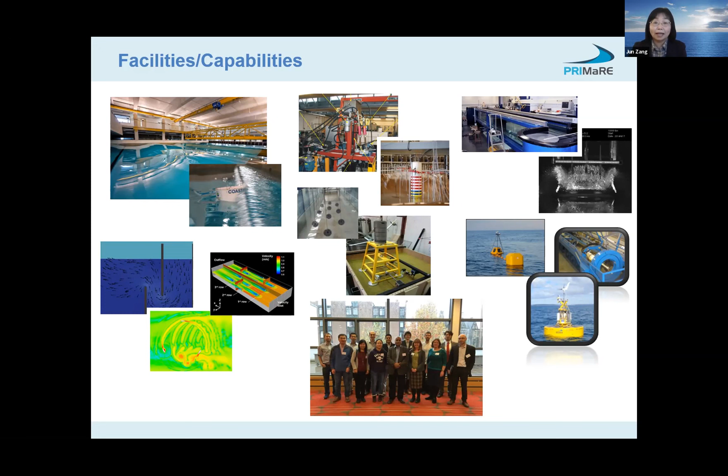So probably this will be my last slide. Apart from this new PRIMaRE seminar series, we are going to have our 10th PRIMaRE conference, which will be held in Bath in June, on the 27th to 28th - two days of a free conference. The call for abstracts is now open, closing on the 10th of March. You can go to the PRIMaRE page to submit your abstract if you are interested in joining the conference. That will be an in-person conference, whereas this is an online meeting.

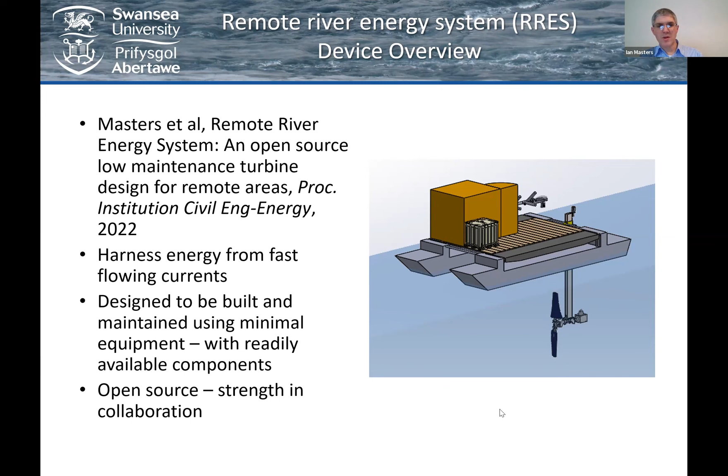So the device we're building is not quite the one we published in the paper - this is using some locally available barge technology. The barge exists and we're just borrowing it from one of our partners. It's a 10-metre long floating platform with a 2-blade turbine underneath. I'll come back to why it's 2 blades in a little bit later.

A water pump power takeoff, on a simple catenary mooring. The mooring spreads about 60 metres in 20 metres of water depth. We fitted it with lots of sensors, as many as we think is useful. And to keep us all going, there's a control cabin where we can run a laptop and other things on top of the barge. So that's the device.

We're trying to follow best practice, and there's a technical standard about early stage development, TS 62600-202, which outlines 4 stages of development for a small scale test. You evaluate your design and technology readiness level, or TRL, as you go through the stages. As you iterate around each stage and go on, in theory you make sure you don't move on from one stage to the next until you've got all the problems sorted out.

We're working against a deadline, so we're having to compress our stages 3 and 4 a little bit, but the first couple of stages have followed that. So the paper I've mentioned is our stage 1, our sort of concept design, and we've just completed stage 2.

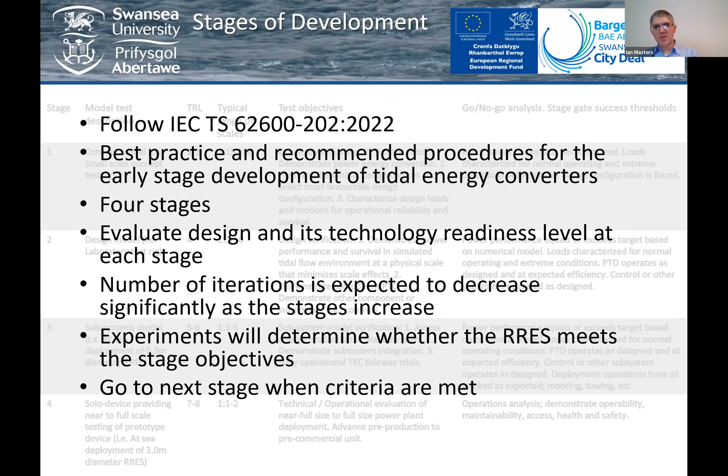We've also completed all of our licensing, consents, risk assessment, method statements for going into sea, and we've completed our design for manufacture stage. So we're currently outsourcing components to be manufactured, and during February we will be assembling this system and putting it in the water.

We're starting with an at-sea test of a platform with a small rotor, just to bottom out some of the problems. Then we're going to take the full-scale power takeoff unit on a bench. After that, we're going to deploy some sensors, and then deploy the barge again with the full-size turbine. We have a license deadline of 31st of March, so pretty quick timescales at the moment. And I'm hoping to share with the wider world how we get on with this system.

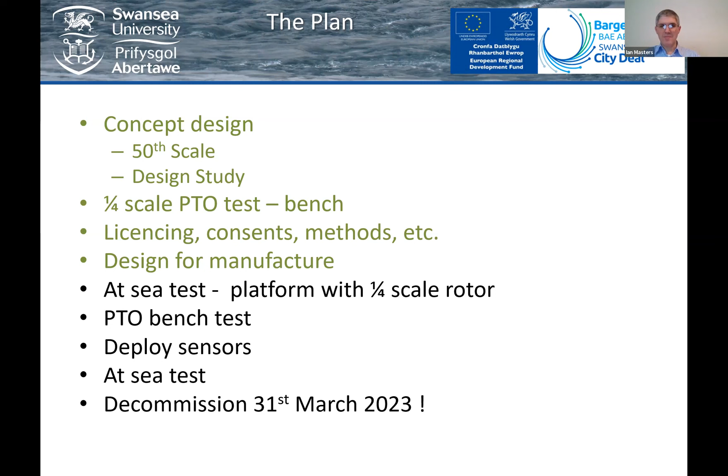So the test site is part of META, the Marine Energy Test Area. META have, I think, 8 or 9 sites in and around the Milford Haven estuary in the west of Wales. We're using the Warrior Way site, which has fast flowing water.

For those of you outside of the UK, if you drive west from London for about 4 hours, you get to the other end of the M4, and then a bit further you get to Pembrokeshire. It's about an hour and a half from Swansea, where I am at the moment.

The site is a tidal estuary. It's about 20 metres at high water in the location we've chosen, with a tidal range of typically 4 or 5 metres, sometimes up to 10. It's mostly tidal, though there are some river inputs to that location.

The META team have been great in helping us with our risk assessments, with our marine planning, and all the licensing we've had to do with the Port Authority and Natural Resources Wales, who operate the environmental licenses for the area.

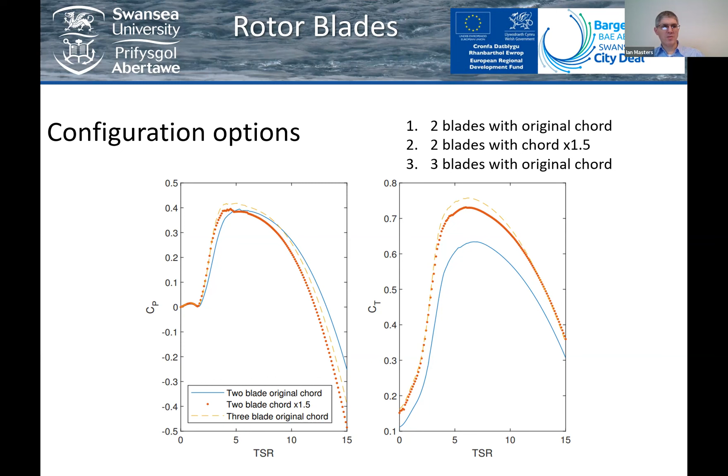And we have a peak mechanical power at the rotor of about 7 kilowatts. We're expecting slightly less than that at the pump. Because this is a remote location system, we're not too worried about the efficiency of the power takeoff, so you simply just oversize your rotor slightly for a particular power output. We're looking at robustness rather than efficiency.

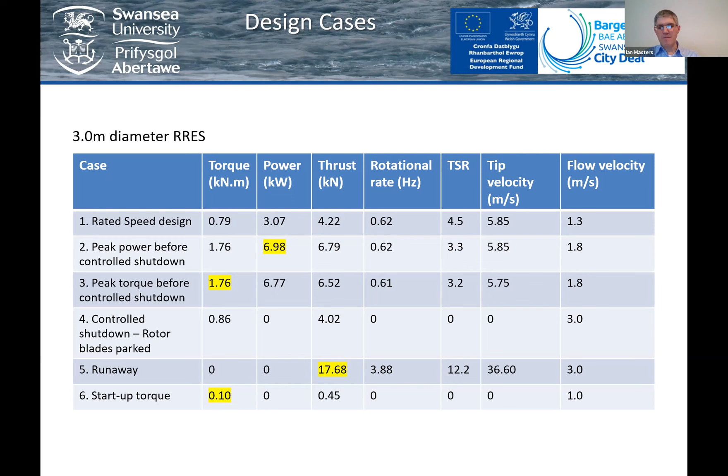Okay, this is our first real test, was to build the power takeoff at a small scale in the lab. We've learned a lot from doing this. It's a simple crank arm with a pump.

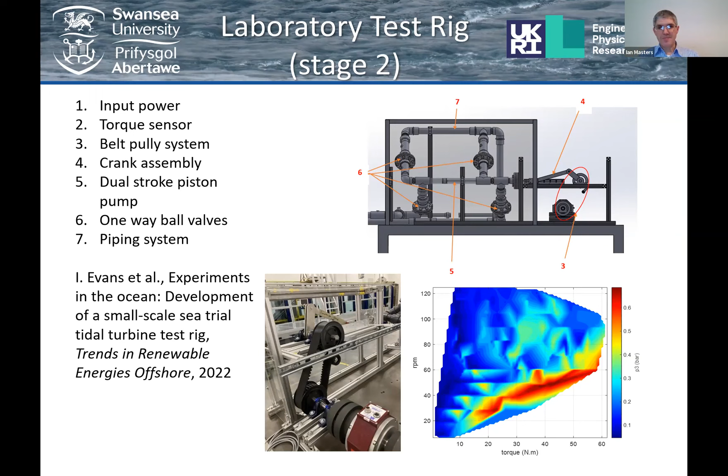The thing we're going to do next, once we've built the system, is deploy it in the river with a small turbine. We've 3D printed some small turbine blades, less than 1 meter in diameter. That's going to allow us to prove our deployment process. We're going to check our mooring load sensors, check our data logging system is working, and practice doing experiments with the small power takeoff we just showed you on the bench. That really is a risk reduction stage, both technical and operational risk reduction. That's only going to be a few days in the water probably, and then we'll decommission briefly, go back to the lab and do the next bit.

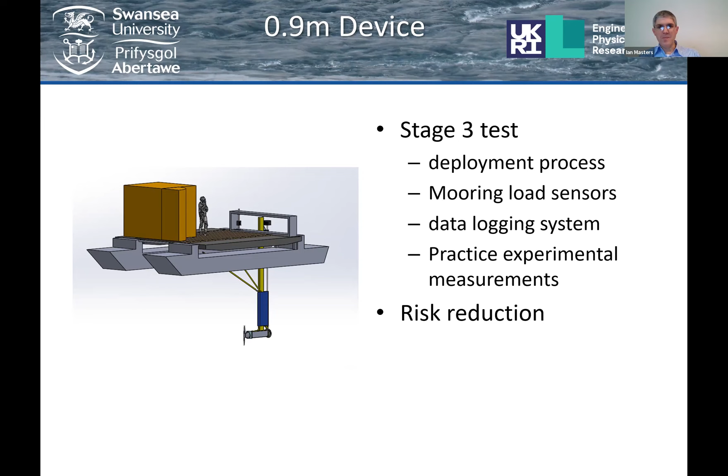When we're ready to redeploy a full-scale system, the first thing we're going to do is put some sensors down. We're using a Raspberry Pi based low-cost data logger, which some of you will have heard Tom talk about in the past. We're taking lots of measurements around the platform to try and maximize the value of this experiment. We have at least one ADV on the platform, probably two, for taking high quality point measurements. We're going to put down three ADCPs, some of those in the right place to use the IEC standard for performance, and hopefully one of them will pick up some wake effects. On the other side, as you can see in yellow, is our converging beam ADCP system on the SUSRIF platform, which I talked about at last year's PRIMaRE conference. We're going to put that unit back in the water and use it to take large scale ADV measurements at rotor hub height.

We've instrumented the turbine using blade root strain sensors for torque and thrust. We're also measuring RPM, and measuring mooring loads from the mooring lines. On the power takeoff pump, we're measuring flow rate and pump pressure to give us power output from the pump. Hopefully we'll be able to do some wake measurements using a drone for video measurement and also transects from some sort of vessel, though we haven't quite worked that bit out yet. We're going to try and do all of that.

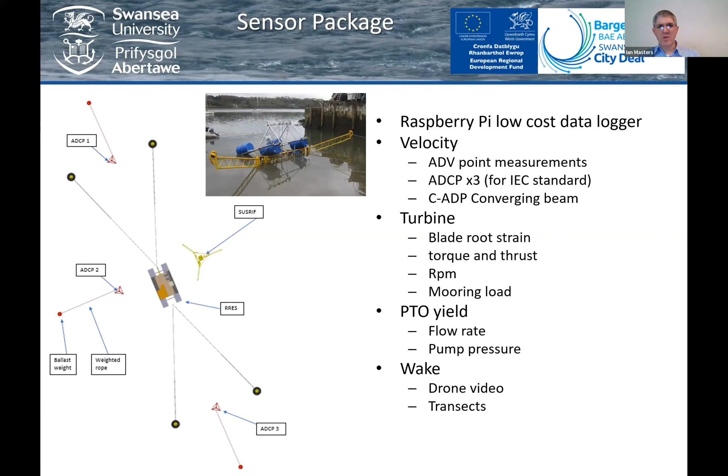Okay, this is the full-scale system design. As I've mentioned before, it's a robust design, so we've gone with a fixed pitch, variable speed rotor. We have wet running bearings, which sit inside the yellow housings at either end of the main drive shaft. The crank mechanism on the left of the slide is a wet running crank mechanism, driving this pump arrangement, and we have closed loop fresh water inside the pump. If we get some leakage from fresh water to salt water, we're not too worried, and we should be able to pick that up by monitoring water levels.

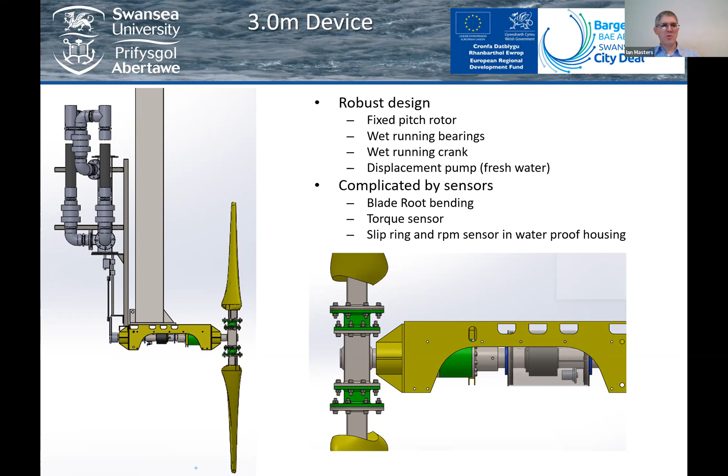That robust design gets completely complicated because we want to put some sensors in. The green bits on the image are the blade root bending sensors and torque sensors, which take a fairly clean, robust system and add loads of complication. We also need a slip ring to take data signals out, and we've got an RPM sensor. Those both sit inside a waterproof housing in the center of the shaft, which you can see there as well. You quickly realize that you try to do something simple, and then when you actually want to turn it into an experiment, you have to make it complicated. So that's the system.

I really wanted today to talk about collaboration, and perhaps in the questions and discussion in a moment we can do that. In March, there's potential for other things to be deployed on the platform while we're in the water. So if that's you, and you want an opportunity to put a piece of kit on the platform for a couple of weeks, come and talk to us. We have a platform available. We're also very open to visitors. Obviously we're going to work out our operational schedules, but if you would like to visit, you're welcome. We are going to publish the data we're collecting, and we're going to publish the turbine design and the SolidWorks files. We want to open source this and collaborate.

That might take us a little while to happen, so if you want that sooner, please ask us for early access to that data and turbine design. When we've completed this set of trials in March, the platform will be available for other tests. So if you have a different turbine you'd like to test, or another type of technology, talk to us and we can make the platform available.

The turbine itself, perhaps in the longer term, we can use it to test other components. It's not that difficult and expensive to change the blades for a different design. We could look at tip features or trailing edge features on a blade design. And of course, the power takeoff can be swapped out for other types of power takeoff as well. So all of that opportunity is there, and we're happy to talk to people about some of those opportunities and what's possible after we've finished our testing. That's the collaboration we're hoping to have with people. I'm very open for conversations about those things.

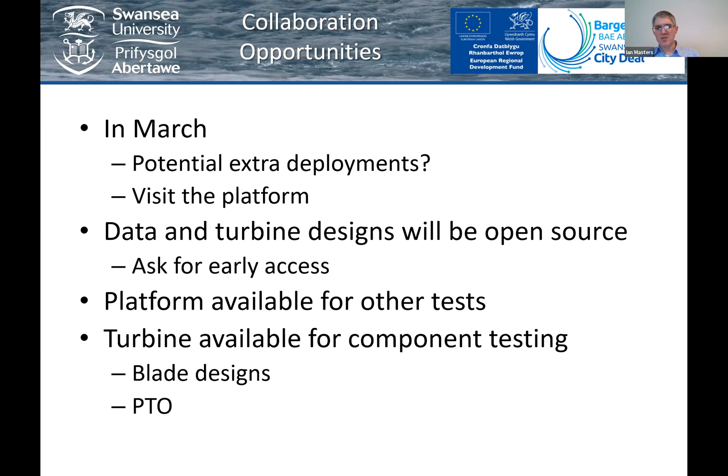So what have I learned so far? And we haven't even got this in the water yet. The first thing I've learned is field testing is complex and complicated and requires lots of different layers of information. We've been working through those now for the last 6 months, and we're almost there. And of course, once we get to the water, everything will change again.

We learned quite early on that putting a turbine in the water is the easy bit. It's only of value when you've got lots of data, and the sensors are not cheap and they're not easy to configure. So we really are trying our best to get some good quality data from this platform design.

I'd like to thank our team at Pembroke Dock Marine, Meta, Catapult, and Rudders Boatyard, and our other local suppliers that are helping us with this development. Like I said, we're aiming to collaborate and open source. Over the next couple of months, my plan is to put updates to this technology on Twitter, and there's my Twitter handle. Thank you very much.

Thank you, Ian. Have you finished your presentation? I have, I thought I wanted to leave plenty of time for some questions and discussion. Okay, that's great. Yeah, excellent. Congratulations on this great project, and thank you for sharing that with us.

Before I open the floor to questions, can I ask one question about the flow conditions, the local water depths, and the wave conditions? I'm just wondering whether some other project may like to collaborate as well.

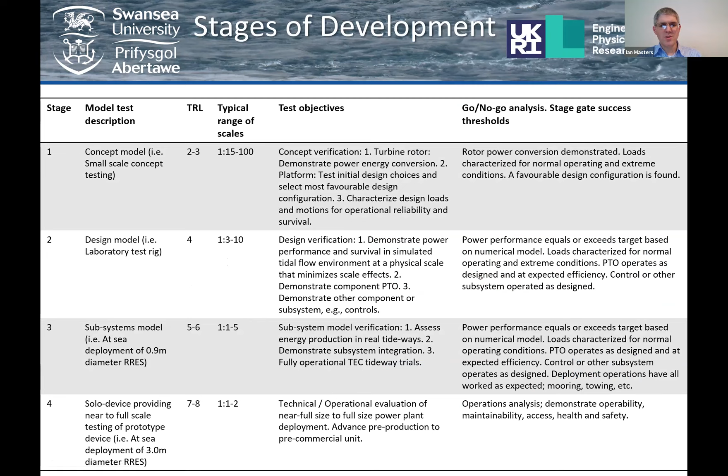Yes, let me come back to the site diagram. So we're at the top end of the Milford Haven estuary, in Milford Haven, and it's quite a large test area, about 1 kilometre in length. We're using the far western end of the site because it's the deepest water. We think it's about 20 metres at high water, maybe 15 to 16 at low water, above a sort of sandy, gravelly seabed. It tails off quite shallow underneath the cliff on the south side of the platform.

There are other sites within the Meta family which have larger wave climates, for example, so if you're looking for wave climate, go somewhere else. It's pretty sheltered, there's a little bit of fetch on it, but not much. But yes, very much available. Flow rate is about 1 to 1.5 metres per second, typically 1.8 on a spring, particularly when there's rainwater flowing downstream as well. Slightly faster on the ebb than the flood.

Okay, thank you. Any questions from the audience? Please feel free. I'm just wondering how can you unmute people on this Zoom platform? Also, you can type your question in the chat box, or you can just speak up to ask any questions to Ian. We can have a couple of minutes before we invite Stuart to present his research. I think people can unmute themselves now, so if you have any questions, just unmute yourself.

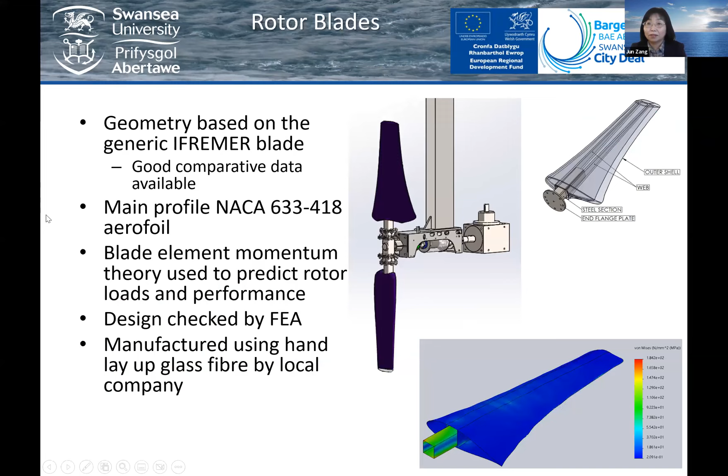Okay, mooring lines all the way. Moorings are on this one. It's a gravity anchor with some chain on the seabed and a catenary layout. We have a pair of moorings each side, and those come to a single line onto the platform. So it's a Y mooring arrangement.

We did some design work, and then after discussion with Meta, we contracted a consultant company to check our calculations. So Iestyn in my team designed those moorings, and they went and checked his numbers and basically upgraded it. We used some fairly simple design calculations, using friction, weight, and thrust. It's not a big turbine, so it doesn't need massive moorings, but they're fairly substantial.

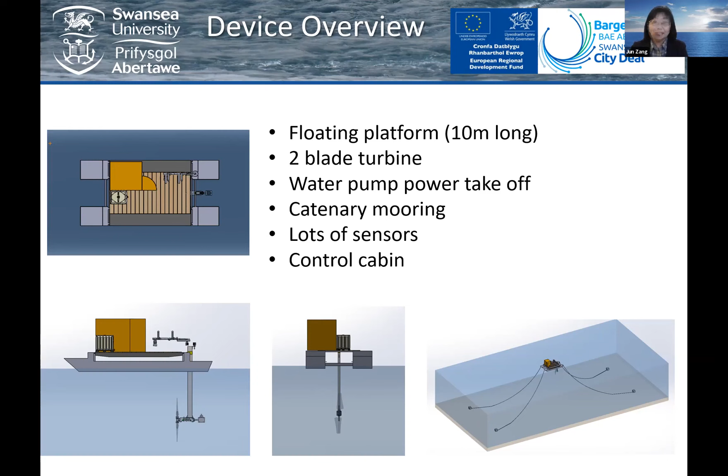Thank you, Ian, I guess Ali is happy with your answer. Thank you very much for your contribution, it's a very interesting project. Everything goes well with your sea trial, and we'd love to hear what's going on afterwards. Yeah, I'll come back in June and tell you all about it. Okay, that'd be great, I hope we can see you in Bath in June. Thank you.

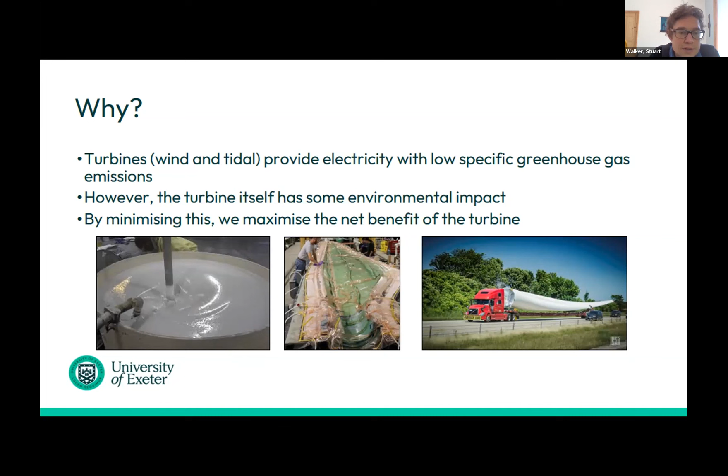But when we look in future, if you're replacing the electricity in a country that has a very low emission electricity grid, you need to think about the embodied energy and the embodied impact of making a turbine, in order to make sure that you actually have a net benefit - that you're replacing higher impact electricity with lower impact. So materials are one way that we can keep progressing and look to reduce the impact further. So that's the reason for doing the work.

So if we look at turbine blades, we've got some wind and some tidal. Just to give you a rough idea, the blades on a tidal turbine, something like a 9-meter blade - this is looking at a single blade of the type in the lower right, the Atlantis type there, rather than the old Sabella design. The kind of wind turbine looking style tidal blade, that's probably about 3 tons worth of blade. So obviously 3 of them adding up to 9 tons in total.

All the problems and opportunities I'm going to talk about today are shared with wind, so I'll keep referring to wind a little bit as well. Obviously in a wind turbine you've got a much bigger blade, a more slender design, and less mass per unit length. But those blades, when you get up to the big 100-meter plus blades, you're starting to look at over 50 tons. So there's huge amounts of mass of this material up there and down there, as it were.

Working out from broad projections of the installed capacities that we're going to be looking at by 2050, you can see that we're looking at the order of megatons of blade mass only going into operation. So it's a big potential opportunity to do something with.

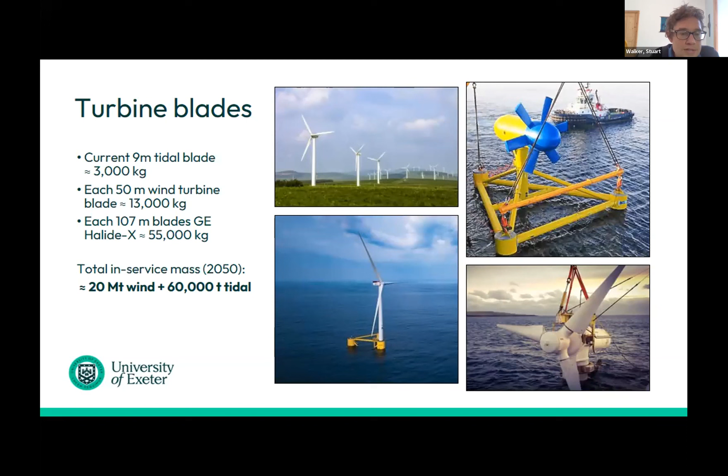So blades - the reason for focusing on blades in some senses is because a lot of materials in a tidal turbine are quite recyclable. A lot of ferrous metals, a lot of steel and such like can be recycled relatively simply, and we know how to do that very well. Blades are one example of where composite materials are used - carbon fiber and glass fiber reinforced polymers tend to be the most commonly seen ones.

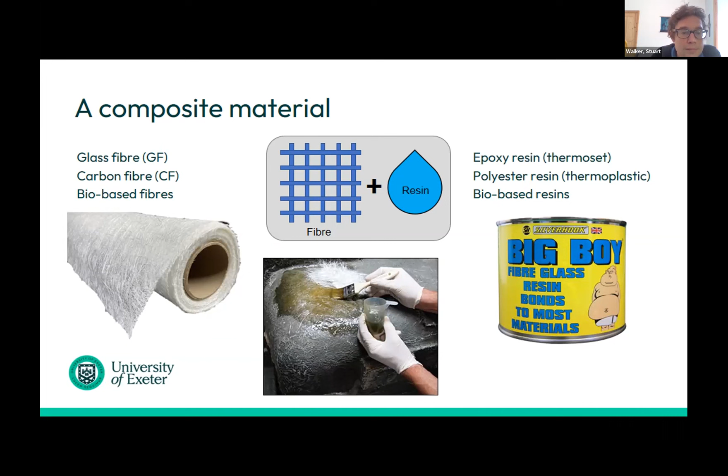I'm just going to go over quickly a composite material and the fundamentals of what that is. In very simple terms, you have a fiber element, as you can see there on the left - that's a roll of glass fiber - and you have a resin element, as you can see on the right, an example of an epoxy resin. This image shows a very small scale, a DIY scale if you like. Mixing those two components together is how we get a composite material - a glass fiber reinforced polymer or a carbon fiber reinforced polymer - by mixing those two together and a curing process. So that's at that scale.

It's actually exactly the same at a big scale, a turbine blade scale. You can see on the right there, that's a huge - I think that's the Siemens factory for a wind turbine blade. You can see the rolls of fiber there on the inside of the turbine, being laid up with the resin to make the composite material. Similarly in the image on the left, that's a tidal blade, after that process has been undertaken and coatings and things have been put on. But you can see it's fundamentally the same material, the mixture of those two parts.

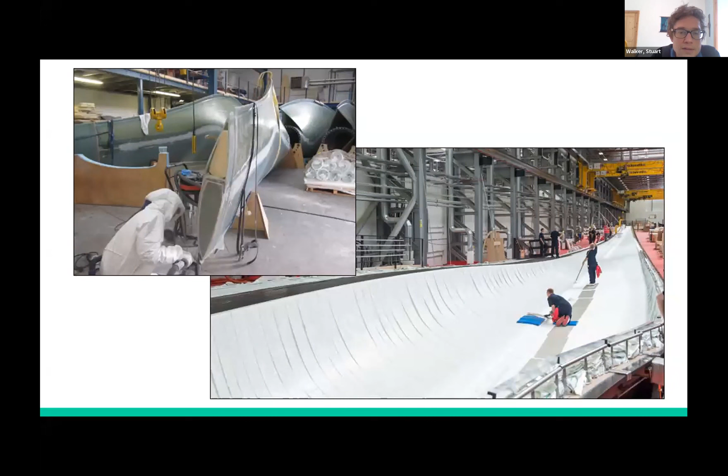One of the problems with these kind of materials is that they're very difficult to dispose of. They're not recyclable like steel or another metal type product. They're quite hard to get rid of, so at the moment they are effectively a single-use material.

So there are, in theory, three disposal options. I'll come back to the first two, landfill and incineration, just to cover repurposing at the end. There are some nice ways of reusing leftover blades, but those are vanishingly small, particularly when we talk about the megatons of mass going into the system in coming years. It's a nice thing to do for a few blades, but not really a major part of the disposal route, which leaves us with landfill and incineration.

So landfill: a composite material is relatively inert. It can be buried in the ground and probably won't cause too many problems, but then it becomes a problem of land use and the resources used to put those things in there, and the land occupied by those huge amounts of mass we're going to be talking about.

Incineration: the materials can be burnt, and we can probably extract a little bit of energy back from the heat generated during that process. But it's a very energy intensive process to incinerate a reinforced polymer, and we don't get anything material wise back at the end. It can also cause problems with air quality and toxicity issues from what's released during incineration, so that's not an ideal option really.

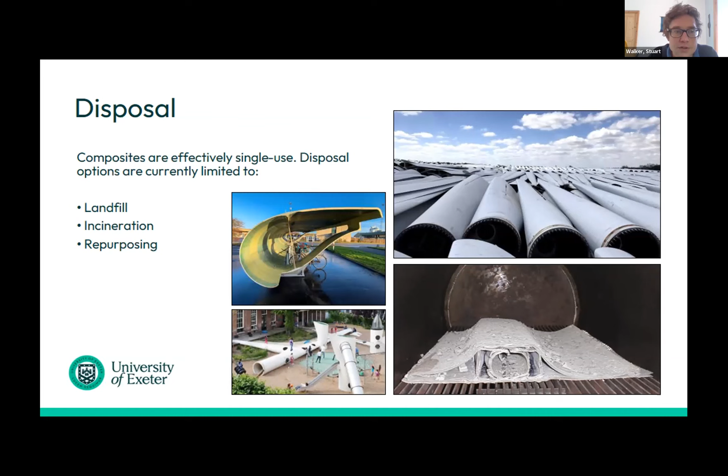So in a minute we'll look at some possible other routes. First, a bit more simplistic look at composites. An ideal composite material that would allow us to dispose of it sensibly would be if we could have the fiber and the resin, mix them together, and get our composite material.

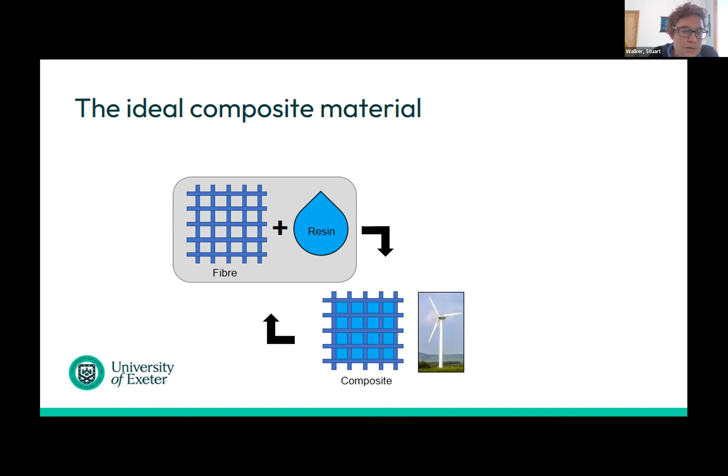We could then use our composite material, and if at end of life we could separate it back into the fiber and the resin, we could rebake that or treat those with individual methods allowing us to recycle or reuse them. The problem is that at the moment, when we mix the resin and fiber together with an epoxy resin, which is used most of the time, that's a thermoset resin, we get our composite, those two parts together, but we're not able to then separate that back.

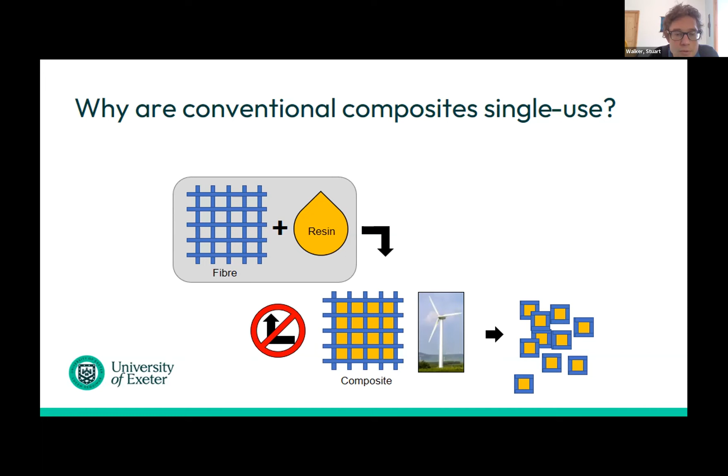So what we end up with is we can break it down into smaller parts, but they're still a mixture of those two elements, which limits the disposal options and sends us down the route of those two we talked about.

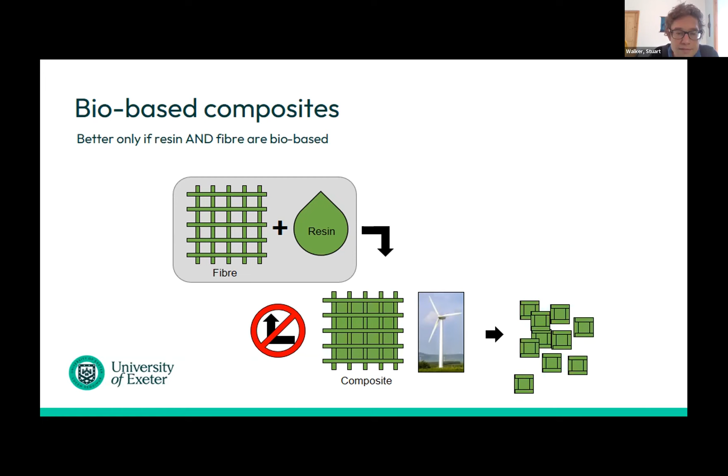So in theory, if you had a bio-based composite made of both a bio-based fiber and a bio-based resin, something natural in both, you could make that into a composite and use it in your product. We still wouldn't be able to separate the two back to the individual elements, but when we broke that down, we'd have a single material type. In theory we could then look to compost that or do some sort of biodegradation, which might give us a small benefit and allow us to regrow bio-based materials in future. So that might be a potential option.

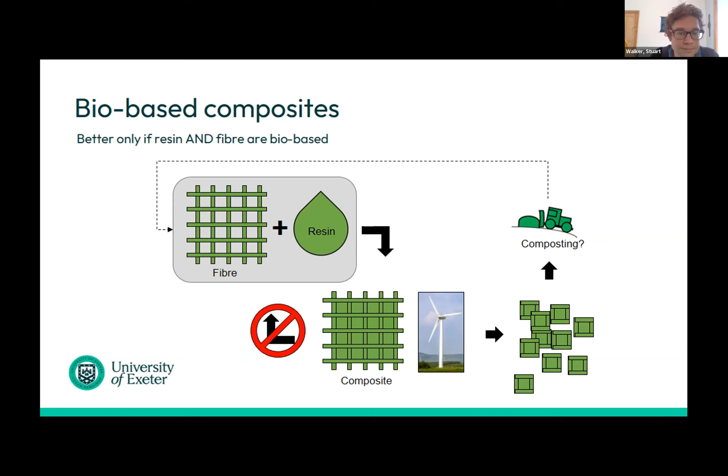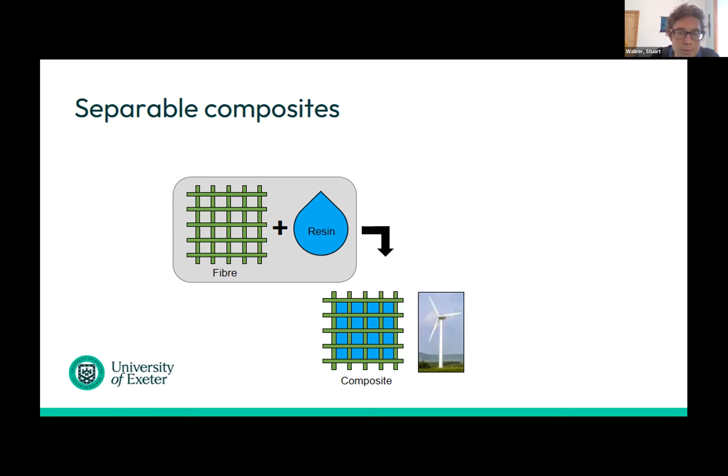There's also what I'm calling separable composites. If we use a thermoplastic resin rather than a thermoset resin, that's a resin that can be heated and separated. The reason this isn't widely adopted at the moment is the ultimate polymer tends to have lower mechanical properties when this type of resin is used. But it does have a major advantage: when we use it, probably with the help of some separation agent or process, we can actually split it back down into the two elements.

The problem we then have is that the two elements aren't as good mechanically as they were originally, so we can't actually reuse it at the same level. We might be able to downcycle it for a different material or a lower level use, or we might just separate the two elements and send them down individual recycling and composting routes, so if it was a bio-based material or some other kind of disposal route. So that's a route potentially to more efficient disposal.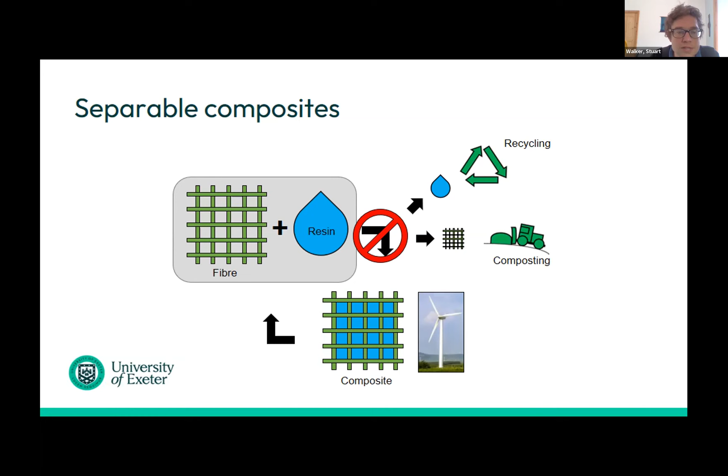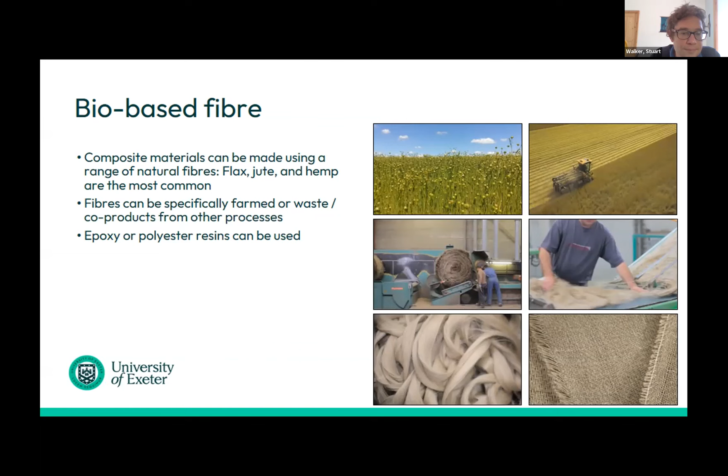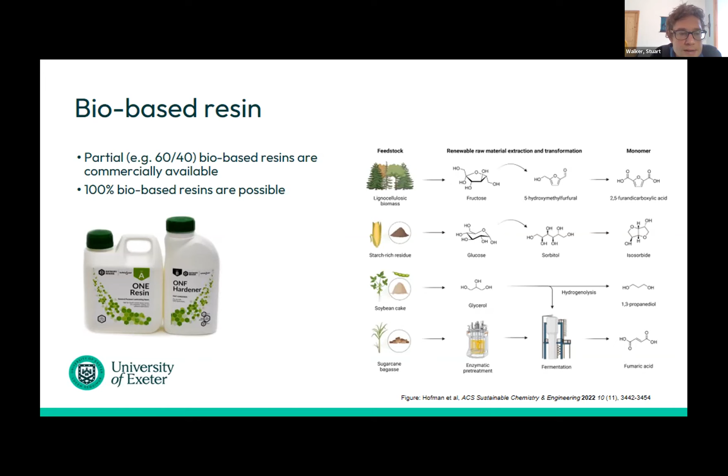We can also have a bio-based resin, either with the bio-based fiber or in a glass fiber usage. Similar to how we can make bio-based polymers, so plastics, we can make PET and HDPE, for example, from bio-based sources by breaking down things like sugarcane and forest residues. We can break them down into the chemical building blocks used to make these polymer products, and through that process we can get 100% bio-based resin. It's currently much more economically viable to have a mixed resin, partially bio-based and partially fossil-based, but the 100% bio-based resin is in theory possible.

So now I'm going to lead us towards a case study we've done comparing materials. But first, just to look at the life cycle of a fossil-based composite material versus a bio-based composite material. This would apply equally to a polymer or something similar.

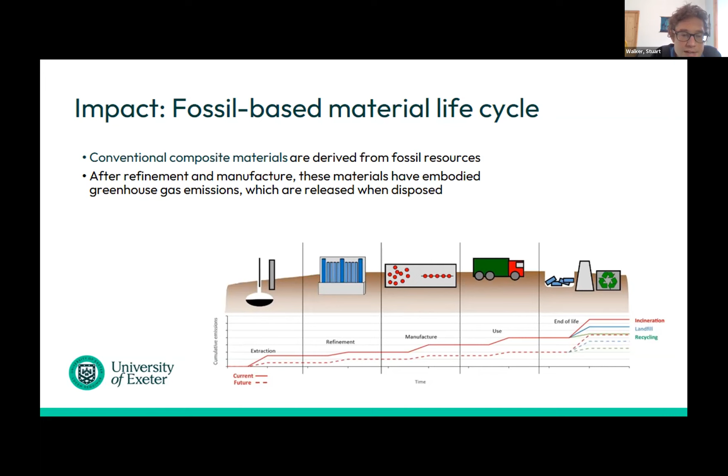If you look at this indicative graph, the red line shows the cumulative environmental impact over the lifetime of the product, essentially. Here we're talking about a fossil-based product - the top of my oil derrick image is missing, but you can see in the first step that's the extraction of oil from the ground. We then go through various processes - refinement, manufacture - all of which use energy and cause environmental impact, emissions and various other impacts. So that red line grows and grows over time as we get to use, and at the end of life, depending on how we treat it, we have various levels of emission. You can see in the fossil case that impact naturally builds up over time.

But if we can reduce those middle phases sufficiently, we can lower that line down, and you could in theory end up with a material that reaches the use phase and still has a net negative emission. So it can effectively be sequestered greenhouse gas at the point of use, in theory.

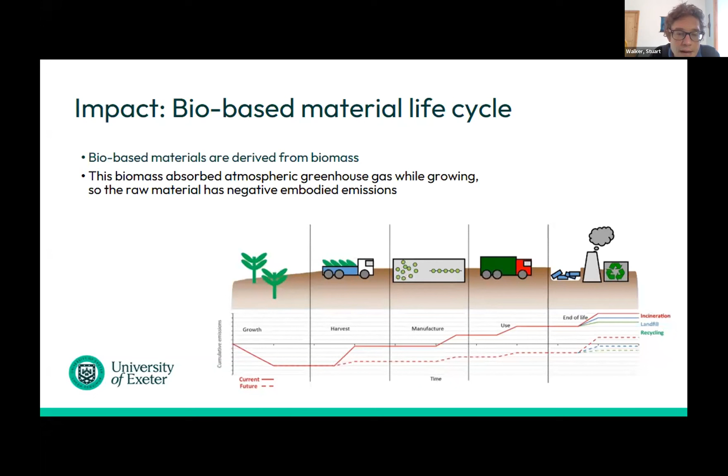So this sounds great for bio-based materials, and we're talking about challenges and opportunities. This sounds like a great opportunity. So to counter that, let's have some challenge.

So it's not a terrible performing material, the flax reinforced polymer, but it does mean we're likely to need quite a lot more mass in order to achieve the same level of performance as we would have in, say, a carbon fiber. So we can't have a lightweight carbon fiber blade - we're going to need more mass, and bringing more mass means it's going to have more impacts, because we're going to do more processing, more transport, etc.

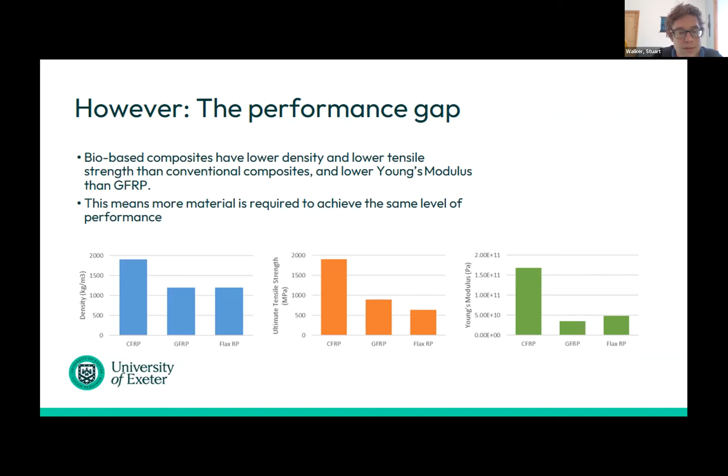So this brings us to a case study that we did as part of the Tiger project. Little bits of this I've presented before, so apologies if people have seen bits of this. We compared the environmental impact over the lifetime for a tidal stream turbine blade based on a few different materials, but here we're looking at glass fiber, carbon fiber, and flax, over a 20-year lifetime.

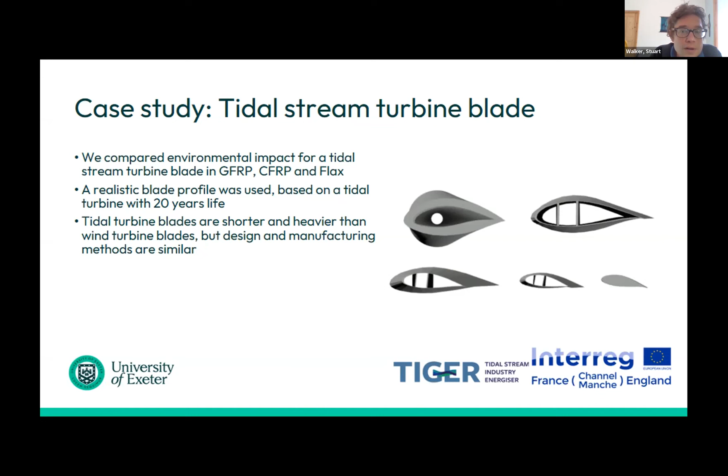The first step we did was to work out what mass of material you would need to have comparative performance to a glass fiber blade. So you can see there we end up with a glass fiber blade about 2.5 tons, a carbon fiber blade of about a ton, and a flax blade about 1.5 tons. So that looks quite good for the flax in theory - it's not as heavy as the glass fiber needs to be, so that's an advantage.

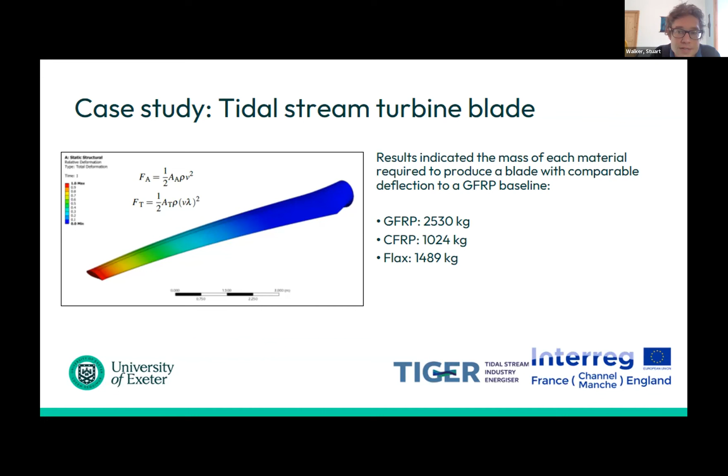In our model, we looked at a flax and polyester resin composite - a separable resin, as we talked about before, so a thermoplastic resin mixed with a flax fiber. In order to separate the two at the end of life, we need to use a recovery solution. The properties are down at the bottom, if anybody's interested - this is from information from Aditya Birla, who helped us with this study. The recovery solution allows you to separate the two and then treat them in different ways, as we showed earlier, but it does have its own environmental impact because we have to make that product. It has 25% acetic acid, so there's a reasonable environmental impact in making that separation product.

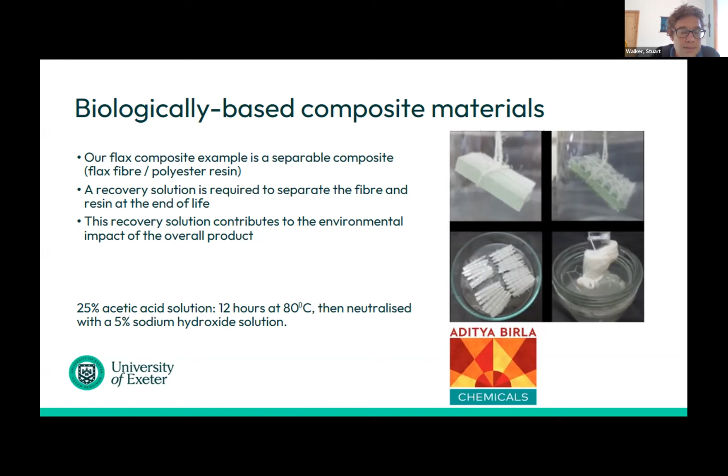Manufacturing process, we don't really need to worry about - this is just to show that we use the same manufacturing process. A common method, VARTM, was used in all the cases that we compared in our study.

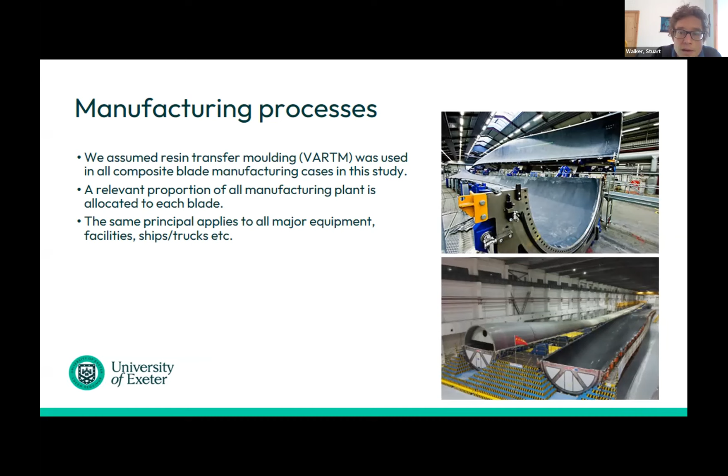So to move on to some results of the case study - first of all, I have results for glass fiber. This is a glass fiber blade made, used, transported, and then at the end of life treated by being sent to landfill. For the single blade, its total impact is around 15 tons of CO2. You can see the majority of that is from the materials, there's a small bit from manufacturing, transport is almost negligible, and then at the end of life we have a bit of an impact there.

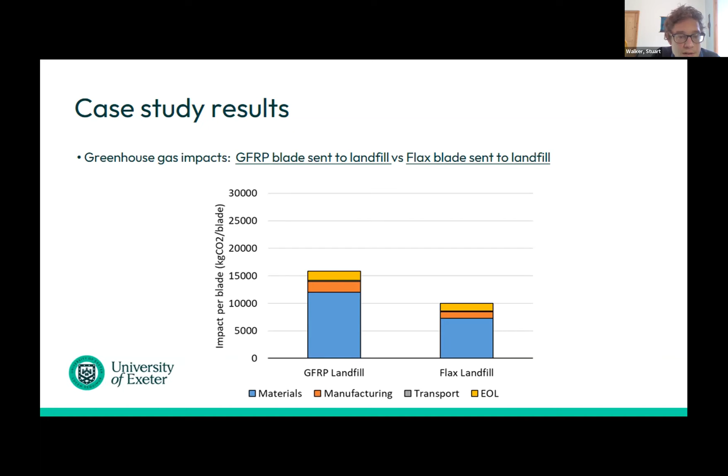If you then compare that to a flax blade, the flax polymer we talked about previously, treating the flax in exactly the same way - even saying that you send it to landfill at the end of life, which isn't necessarily what you would do, but as a comparison it shows us - the flax blade in that case has about a 10-ton impact. So that's a good advantage for the flax blade, it would seem.

If we consider the carbon fiber, it doesn't look good at all, really. That's because even though it's a lighter blade, the impact of the materials is very significant. As you can see, the manufacturing impact is low, and transport is very small because of the light weight. But then when you look at the end of life treatment through landfill, there's a lot of risk of carbon fiber in landfill, and a lot of embodied emissions required to process it and avoid risks of landfill leakage. So it doesn't look so good for the carbon fiber in this comparison.

As our final result, if we look at the furthest right, there is the flax treated through biodegradation. This is kind of what we imagine would be the ideal process: making the flax blade, manufacturing it, transporting it, using it, and then at end of life, separating those two elements. The flax fiber would be treated by biodegradation, so it would be composted essentially and go back into the soil, and the resin can be treated as a polymer. Unfortunately, that has a slightly higher impact than even the flax landfill treatment. So we should not consider these in isolation, but it shows us that the manufacture of that recovery solution needed to separate the two is actually quite a significant part of the overall impact, which is why the yellow bar there is a bit higher.

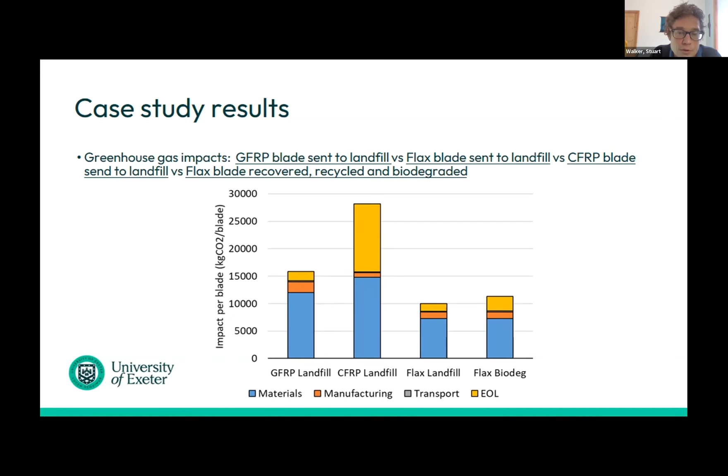As I said, we shouldn't just look at these kinds of results in isolation. They show us the greenhouse gas impact, but we should also consider a wide range of other impacts, such as land use, which is a key one, particularly when we're looking at products that we're growing and using land in order to produce.

So a comparison here just to show - apologies, this is from a different paper, so it has a slightly different comparison in it. But you can see, compared to a glass fiber blade treated by incineration or landfill, if we look at a bio-based blade, the land use in square meters per unit turbine blade is significantly higher for the bio-based blade. That's obviously because we're growing stuff in order to make that blade. So it shows us that although we might have a greenhouse gas emission saving, we have a land use penalty effectively. It's all part of the combined impact that we should take into account.

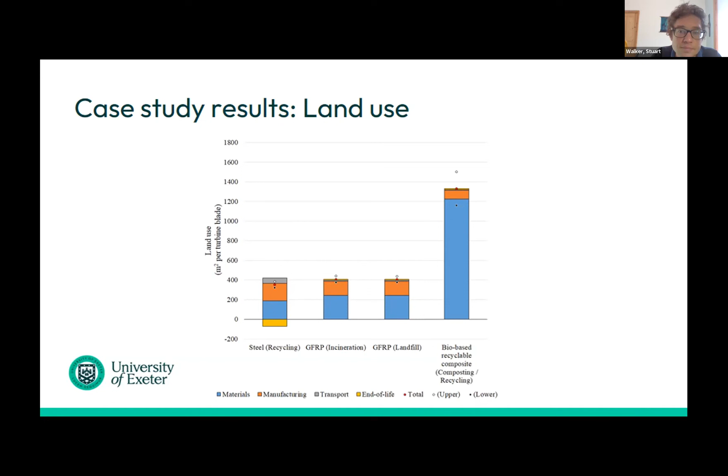So the results of the case study we talked about show that the source of the feedstock is important. That land use impact is high because we're growing that product specifically in order to make the flax for the blade. If it could be some sort of waste product from something we're growing anyway, then that land use would have no additional impact - it would be kind of double-using the land use that's already there. That would be a great way to go.

On the other hand, if we stop growing food crops and start growing flax instead, limiting food supply and perhaps even causing additional water use and other impacts, that would be a pretty significant negative impact. So growing the product doesn't have to just have a single impact - it can have a whole range of impacts depending on how we do it and how well we do it.

So, to work towards some conclusions: at present, bio-based blades do seem to offer a small improvement in impact versus current options, though not without their disadvantages. This needs to be looked into further, which is currently ongoing at PRIMaRE, as Ian mentioned, and various other places, looking at the impact on marine performance - for example, the impact of water uptake on the performance of a blade. If you have a blade that's in the water for 20 years, will it still be performing as well at the end of life? It appears that perhaps not, but that work is ongoing.

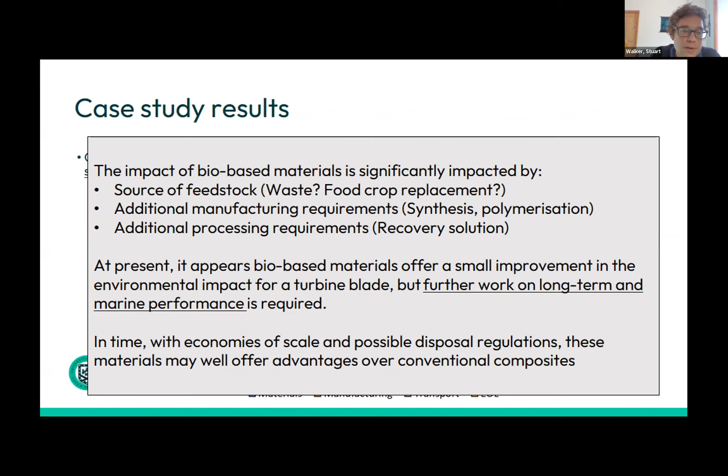Looking at those thermoplastic resins that allow us to separate the two does raise the possibility that if we're going to separate them anyway, we don't necessarily need to use bio-based materials. If we can separate the two, we can look to use other options, provided the materials can be separated, going along different end-of-life treatment routes. That seems to be where the wind industry is going at the moment - not really looking at bio-based materials, but looking at polymers that can be split and treated in different ways, whether that be conventional disposal routes or gummy bears.

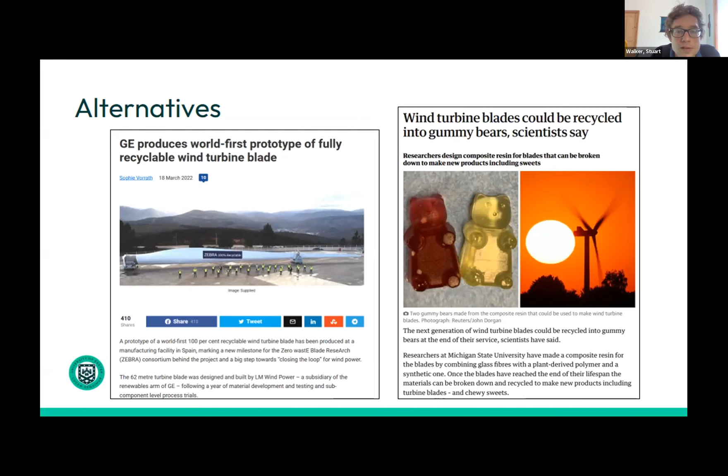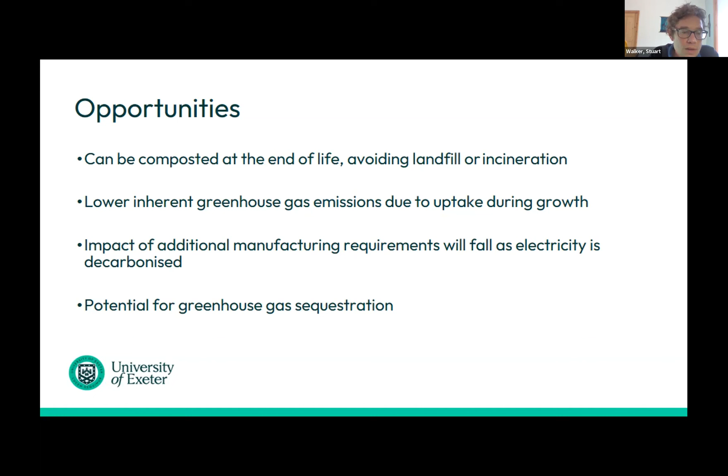So finally, to conclude: opportunities and challenges. Opportunities - bio-based materials allow different end-of-life treatment methods, so you avoid the need for landfill or incineration. Uptake during growth can be a big advantage because you can lower inherent greenhouse gas emissions if you reduce the processing required. The impact of that additional processing will fall as electricity is decarbonised, and it also depends where in the world you do it. If you do that processing somewhere with low greenhouse gas emission electricity available, you can make a big difference, and that allows potential for future greenhouse gas sequestration.

Challenges - economies of scale are needed, as always. We're competing against a sector that's been doing this for a long time and has large, significant economies of scale, so that's a potential area for improvement. Conventional materials with separable resins might be more cost effective, and mechanical performance is already better understood - that does seem to be the way the sector is moving at the moment. Also, source of feedstock must be carefully considered to avoid any kind of land use or food conflict, along with those additional manufacturing requirements.